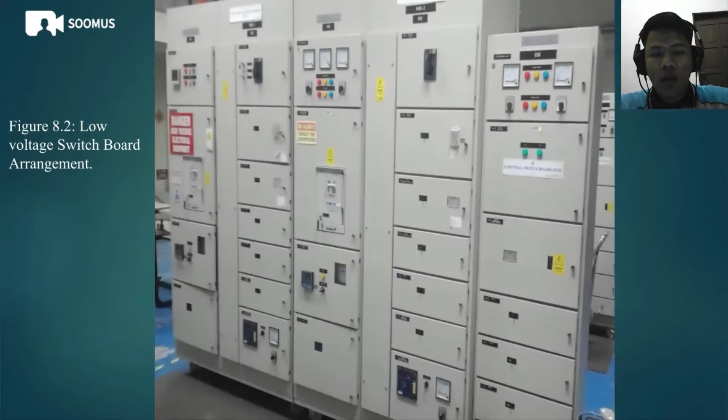My name is Abdul Hakiman bin Abdullah, and now I would like to explain the procedure for turning on the MSB. So before we turn on the MSB, we need to wear PPE for LVSB switching. So we need to wear a safety helmet with a fireproof shield, wear a fireproof suit, wear electrical insulation gloves, and wear electrical hazard boots. So we need to ensure we wear all the PPE before doing the electrical switching.

So from the previous lab, we know that for LVSB, there are two MSBs, which are MSB1 and MSB2. The incoming supply is from TNB, and then from the TNB supply it will come into the LVSB, and it will divide into MSB1 and MSB2.

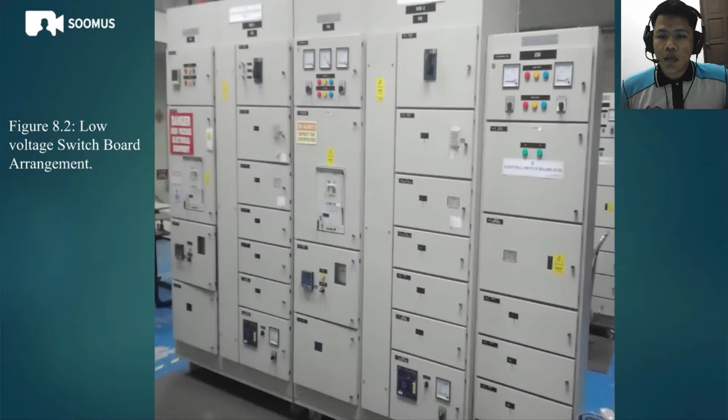Assalamualaikum warahmatullahi wabarakatuh. My name is Abdul Azim bin Muhammad Fauzi and my matric card number is DE1900145. So today for exercise 4, which is the LVSB system and operation, I will explain in detail how to do the coupling process for MSB1 and MSB2.

So for the process of coupling, I will explain three main processes: the first one is the maintenance at MSB1, the second one is the maintenance for the ACB, and the last one is the coupling process for MSB1 and MSB2. So this is the picture for the MSB, this is MSB1, this is MSB2, and the last one is the ESB. So what I have to do for this lab is the coupling process for these two MSBs.

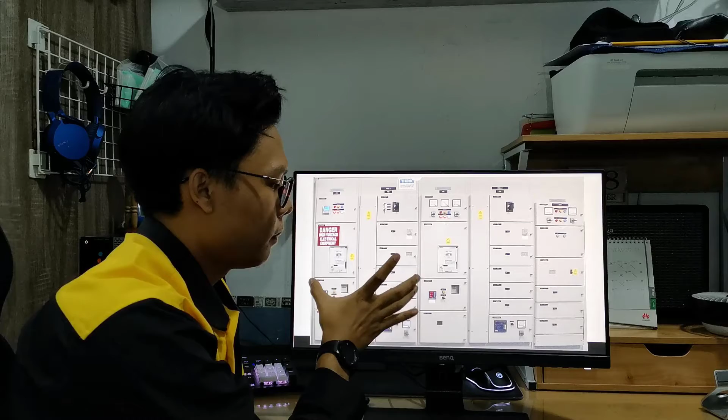So in this lab, MSB1 has a problem or fault, which means that there is a problem with the supply to MSB1. So what we have to do is supply from MSB2 to MSB1. So there are a few procedures that we have to follow. The first one is the maintenance at the MSB. So the first procedure is we have to inform the consumer before we turn off the load. Here is the load, as we can see here, 1, 2, 3, 4.

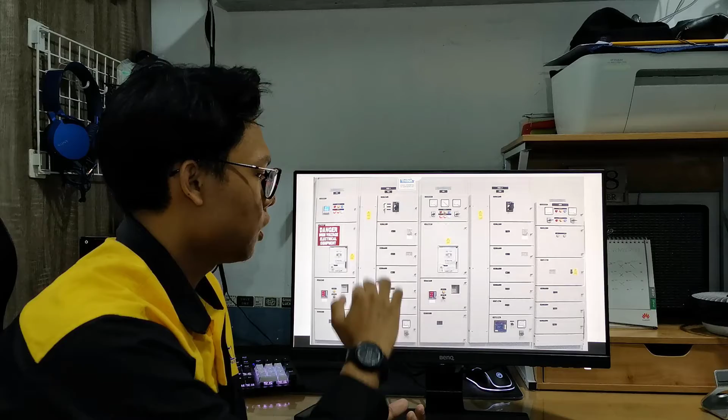After we get the confirmation from the consumer, we turn off all the load here, and then we turn off the power factor capacitor bank, and after that we have to monitor the power meter here, or the digital meter. There is no current, which means that no load is turned on, and after that we have to turn off the ACB, or the air circuit breaker, here.

There is a red switch here. We just have to push the button, and then the ACB will be turned off. So to ensure that the ACB is turned off, we have to monitor the indicator light here.

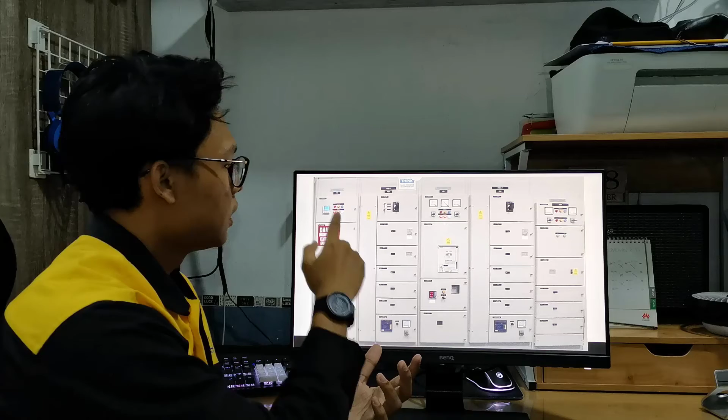The top one is for the bus bar, and the second one is the main supply. So when we turn off the ACB, the indicator light for the bus bar is turned off, which means that there is no supply from the bus bar. And then after we turn off the ACB, we also need to turn off the main supply. They are isolated behind the MSB.

We have to turn off the main supply, and the indicator light for main supply here will also be turned off. And after we check that both indicator lights here are turned off, this means that MSB1 is now fully de-energized with no supply. And then we can proceed to the process for the maintenance of the ACB.

Okay, the next one is the maintenance for the ACB. As I told you earlier, this is the ACB, which is the air circuit breaker. So I will zoom in. This is the ACB. So to do the maintenance for the ACB, we have to use the draw out handle here, and we have to rack out the ACB. What we have to do,

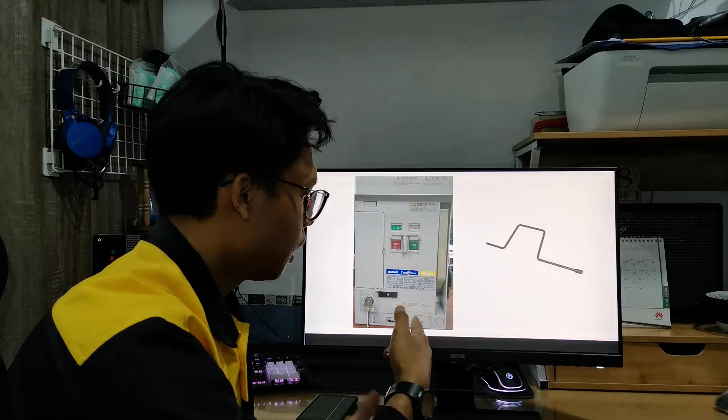we just have to take this draw out handle and put it in the hole here, and then we have to rotate it anti-clockwise to rack out the ACB until, as you can see here, this is the isolated. We have to place it until the third position. So we just have to rotate it anti-clockwise until the isolated third position,

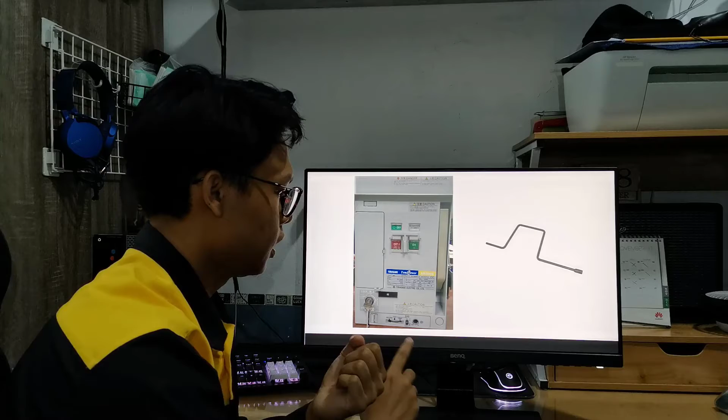and then the bus bar will be disconnected from the ACB, and then we rack out the ACB and put it on the table for maintenance purposes. And don't forget to put the signage as a note to show that this ACB is in maintenance.

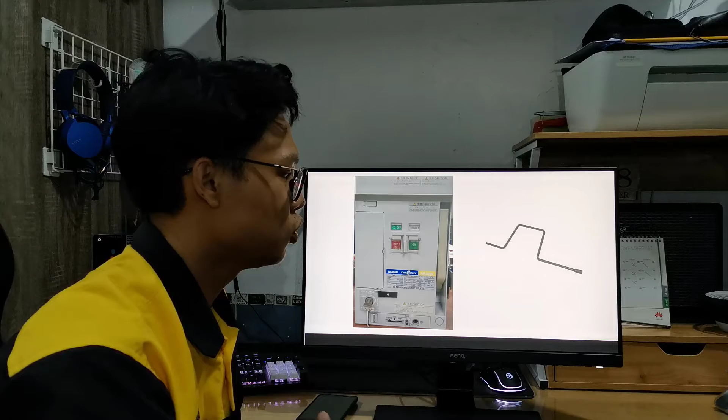So the next one is the coupling process for MSB1 and MSB2. Okay, then we proceed to the coupling process for MSB1 and MSB2. As I told you earlier, this is the MSB1 and this is the MSB2. So for the coupling process, the first procedure is we have to take out the isolator C2 key here.

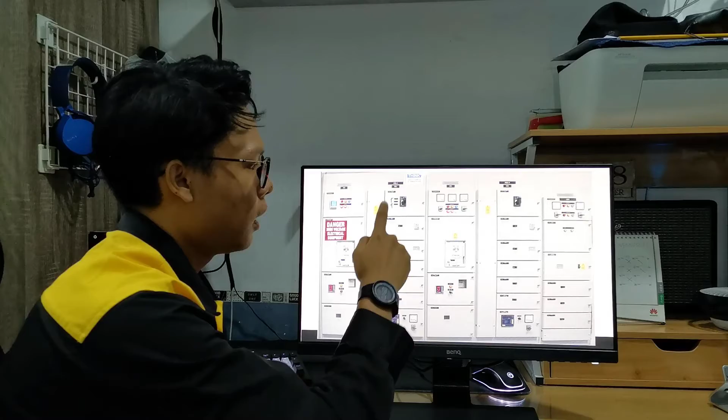So there are a few keys here. There are three main keys: the first one is the C1 isolator key, the second one is the ACB key, and the third one is the C2 isolator key. To gain the C2 isolator key, we have to unlock it by using the ACB key.

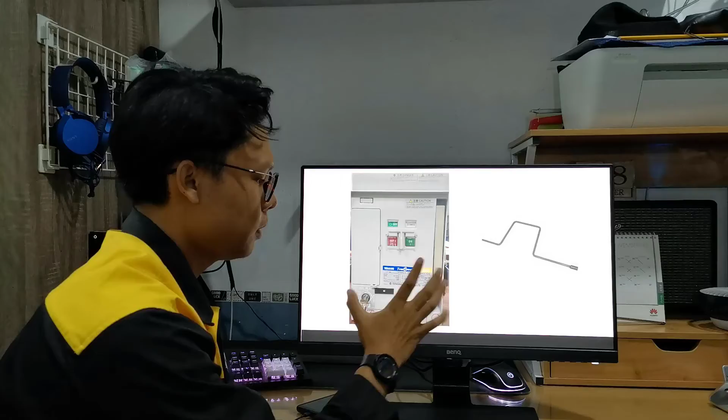So to gain the ACB key, we have to go to the ACB here, and then I will zoom in on the ACB. So here is the ACB, and this is the key. What we have to do is unlock the key by rotating it anti-clockwise and then pull out the key. We go to the key point here.

There are three rows. As I told you, C1, ACB, and C2. So we place the ACB key at the second row, then lock, and we will get the C2 key. So for the coupling process, we have to place the C1 key to the isolator C1 and place the C2 key to the isolator C2 here at MSB2.

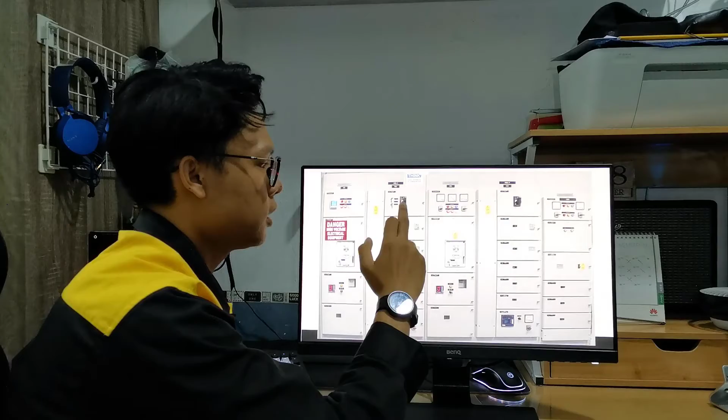So for this case, for this lab, MSB1 has a problem, so we have to supply the power from MSB2 to MSB1. So to turn on the isolator, we have to determine which one is the upstream and which one is the downstream. In this case, MSB2 is the upstream and MSB1 is the downstream. So we have to follow the step: turn on the upstream first and then the downstream.

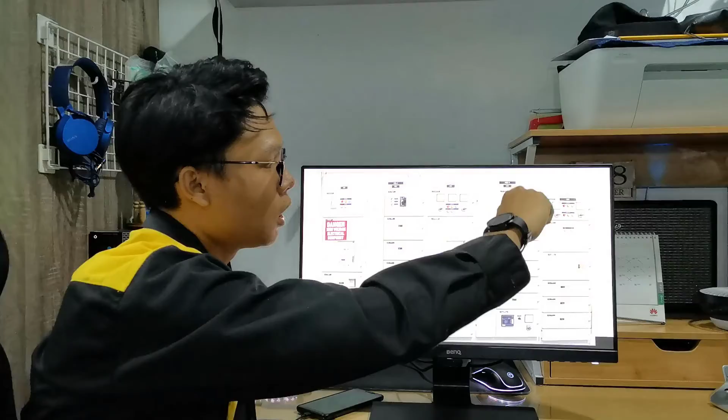So next procedure, we have to turn on the isolator C2 here. We have to turn it clockwise, and also the C1 key. And then after we turn on these two isolators, we have to monitor the indicator light here at the top, which is the bus bar supply. When it's turned on, it means that the coupling process for MSB2 and MSB1 was successful.

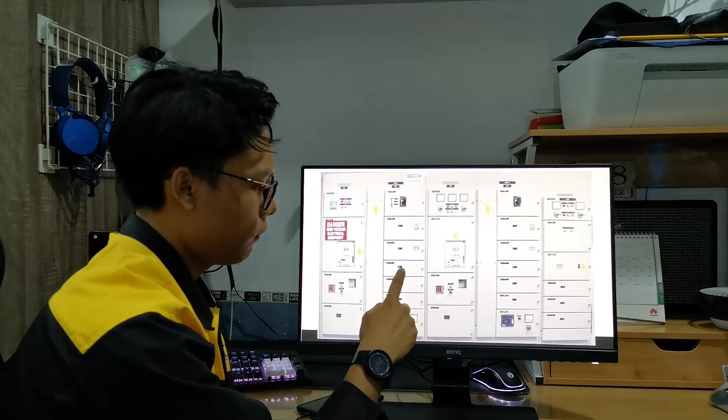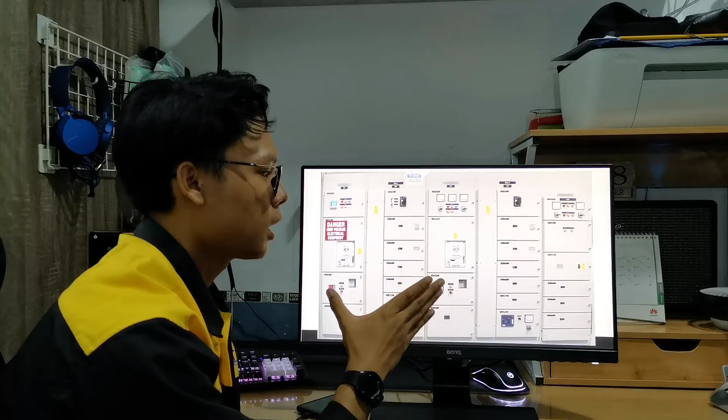And then after MSB1 has received power from MSB2, we have to call the consumers to tell them to be ready to receive supply from MSB1. And after we get the confirmation, we can turn on every load here and also the power factor capacitor bank. And that's the last process, which means we have completed the coupling process for MSB1 and MSB2.

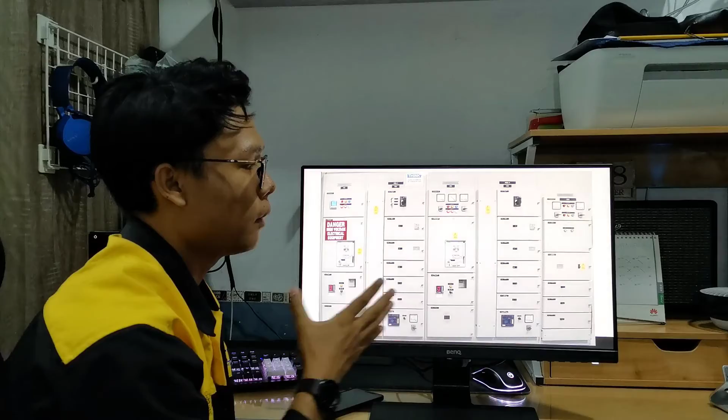After that, we can proceed to the maintenance for MSB1 for it to be able to restore energy and uncouple from MSB1 to MSB2.

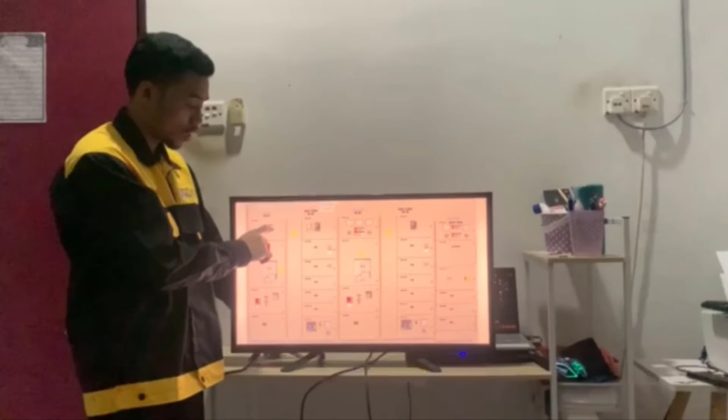After we turn off the power capacitor bank, we need to check the current status at the digital meter here. The current should be 0 ampere because there is no supply. The next step is we need to turn on the isolator C1 here by pushing it up, and the MSB1 here, push it up, and then we need to check the bus bar indicator here. The bus bar indicator should be de-energized, or turned off, because there is no current to the bus bar.

The next step is we need to turn on the isolator C2 at the MSB2 by pushing it up, and then we need to take out the key here. We take out the isolator key C2 and put it in position number 3 at the isolator C1. Then we take out the isolator key from C1 and put it at position number 1. And as for position number 2, which is the ACB key, we need to take it out from position number 2.

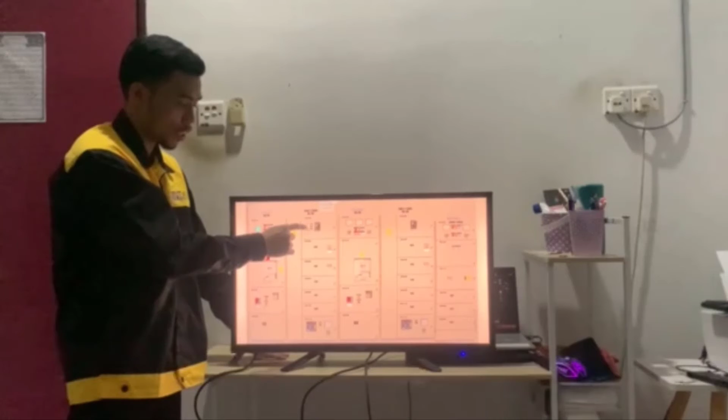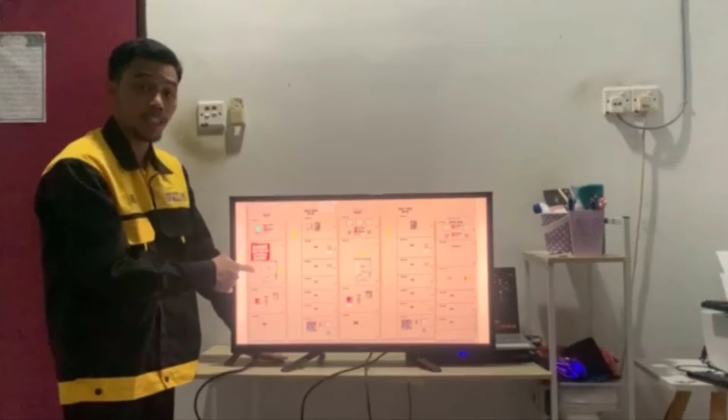After all the steps are done, we need to insert back the air circuit breaker to its normal position, which is at the MSB1. Then we use the key that we took out from position number 2, put it in the ACB keyhole here, and rotate it clockwise until the unlock position. After that, we need to give the MSB1 the power supply from the isolator, from back here. Then we check the incoming indicator here. It should be turned on because there is supply coming from TNB.

After that, we need to open this door that holds the air circuit breaker and take out the draw out handle of the air circuit breaker. We put the draw out handle in the hole and rotate it clockwise several times until the air circuit breaker is in the connect position. After that, we need to charge the air circuit breaker by pulling or pumping this lever several times until the indicator at the air circuit breaker turns yellow.

When the indicator turns yellow, or charged, we need to turn on the air circuit breaker. After that, we need to check the bus bar indicator. The bus bar indicator should be turned on because there is supply coming from the incoming to the bus bar. After we are done with all the steps, we need to notify the consumer that we want to turn on the LVSB system because the MSB1 already works properly.

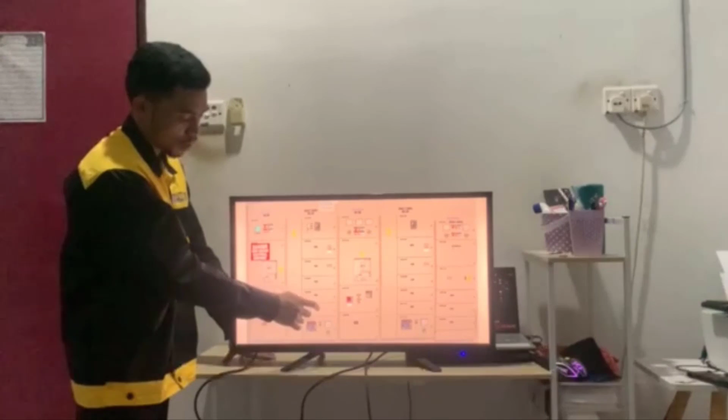Then we need to turn back on these 4 power supplies here, which are EFR, ELR and 2 connections here. And then we need to turn back on the power capacitor bank here. That is all the steps we need to do to restore back the normal supply for the MSB1. The final step is we need to record all the work that we have done in the logbook.